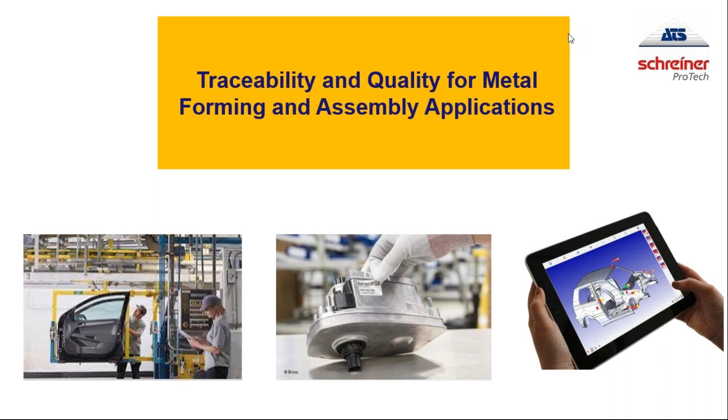The focus of the webinar are possible solutions for two issues that many OEMs and suppliers are facing today. As manufacturers continually drive lot sizes to smaller quantities, companies are facing increased documentation and traceability requirements. In order to respond to quality issues, the question becomes, how do I serialize and mark my parts and assemblies? And then how do I digitize my quality data and trace that data back to the individual unit level?

This is especially challenging in metal fab and assembly processes where metal parts are difficult to mark, and both parts and assemblies may go through welding, painting, or other processes that have harsh environments. So we're going to start today with Doug Stubbs from the Schreiner ProTech company, who will provide an overview of innovative labeling solutions for metal fab and assembly operations.

After that, I'll give a brief demonstration of software that's in use in many plants for recording and reporting out on your quality data.

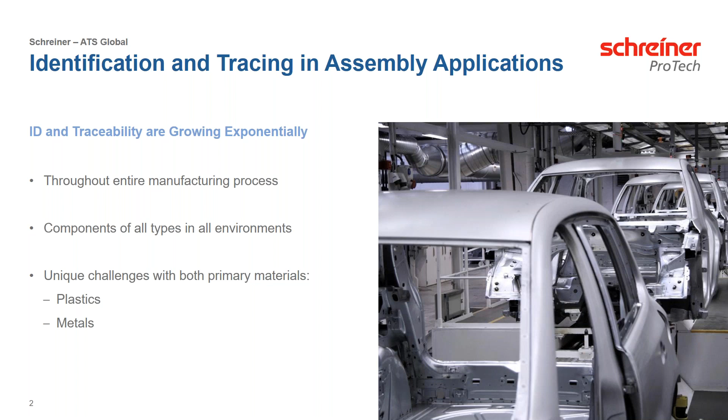There are unique challenges with both of the materials that are used in typical assembly applications, in particular plastics and metals. So there are three real common technologies available for individually marking for assembly applications. The first and most simple, of course, is traditional labels. Traditional labels have had their difficulties in some applications because of the primary challenges of adhesion, abrasion, and contaminants or chemicals.

In particular, the ability to keep the label onto a particular substrate is dependent upon the material itself, as well as the adhesive that is selected. There are a lot of very good, huge adhesives companies now that can create formulations to stick practically any label type material onto virtually every surface as well.

In terms of abrasion, that has always been challenging, particularly in assembly applications where the parts can be very bulky and not individually packaged, and therefore they can be scraping and bumping against each other throughout the entire process. So any label that is exposed must be able to handle this kind of jostling around and potential abrasion as well. And then the most challenging can be the influence of contaminants or chemicals.

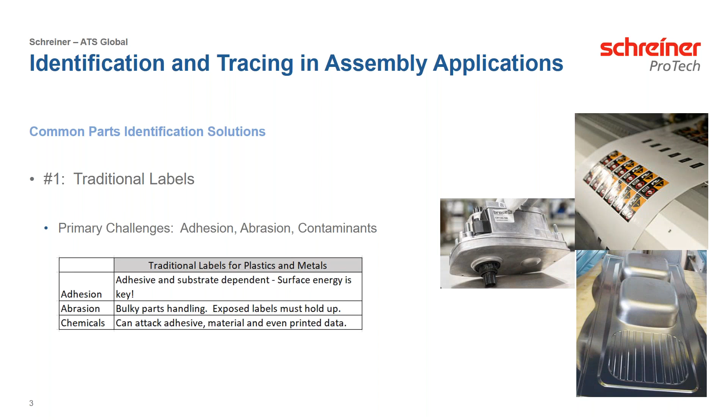Chemicals in particular can be very challenging for labels because they can attack and degrade the adhesive. They can attack and deform the material or the paper-like material of the label itself. And even after a label is printed, the ink that is on the label can be compromised with the right mixture of chemicals in typical processes as well.

So one of the primary methods to protect a traditional label is the use of a protective mask. Individual masks have been around for decades. They're basically a removable overlay that is a protective wrapper for the actual label itself. When constructed correctly, they are both chemical and process and abrasion resistant.

They protect the entire label until the time of your choosing when you wish to remove the mask itself. They are typically not a very costly solution to this, and they are exceptionally used in many applications throughout these kinds of processes.

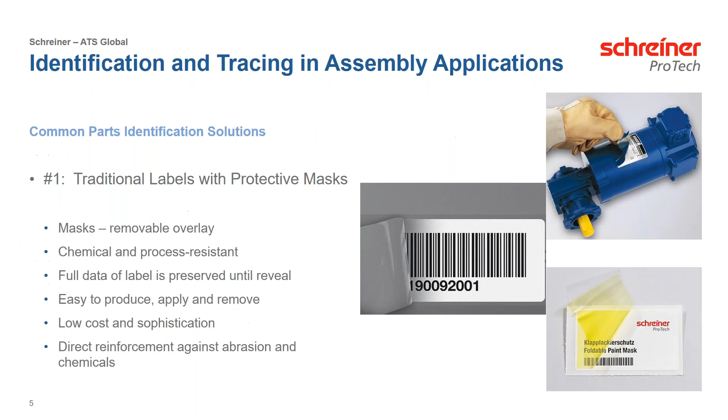A second technology that is very common but not well known is the use of laser etchable films. These laser films are extremely rugged, adhesive-backed traditional type labels, just made of very special types of materials. They are extremely resistant to chemicals, extremely good against abrasion as well. They can work at very high temperatures, very low temperatures, and they are an alternative typically to direct laser marking on the parts themselves, and they use standard industrial lasers.

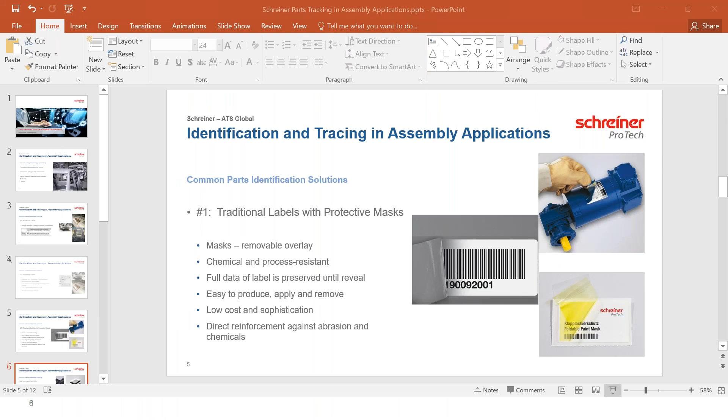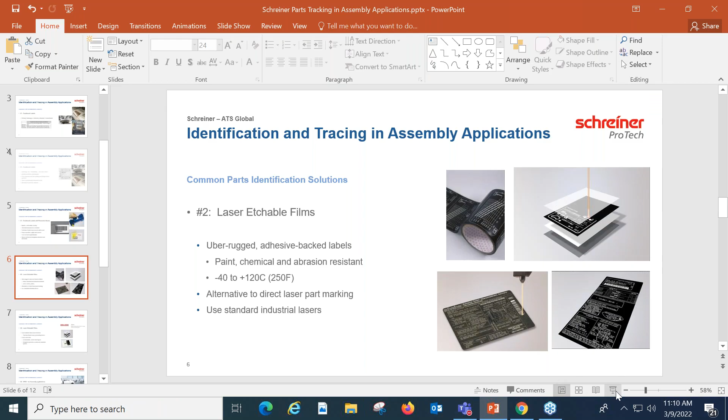Okay, there are two primary types of these laser etchable films. The most common is known as an ablation film. Ablating an actual material is where you use the laser to burn off a top layer and expose, in this case, a different color second layer beneath it. In the video we just saw, it was a black material and it was then exposing the white underneath it. Ablation films are exceptionally common. However, when they burn away that top layer, those fumes have to go somewhere. So you typically have to have an air reclamation system to keep those fumes away from workers as well.

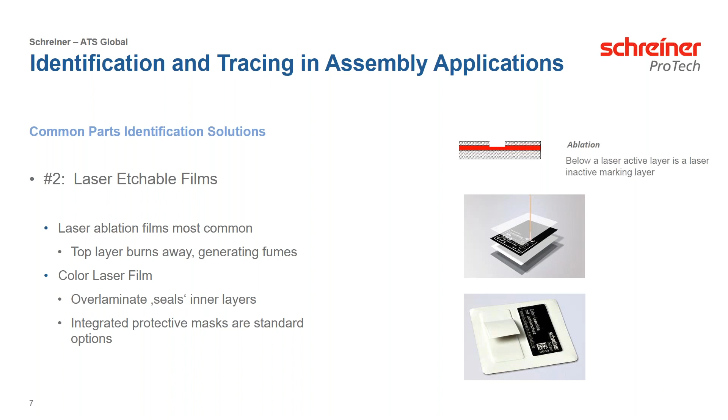A second option, very similar in construction, is known as a color laser film. The primary difference of a color laser film is that it has a top layer, a top laminate that seals in the layers beneath it. When the laser prints through that top laminate, it does not damage that laminate. It simply passes through it and then pushes away the black material to expose the white underneath it. The primary benefit of that is there's no smoke generated during the printing process because all of the black material is sealed in, resulting in a no fume type application. And this particular product is available with optional paint masks or protection masks that we looked at previously too.

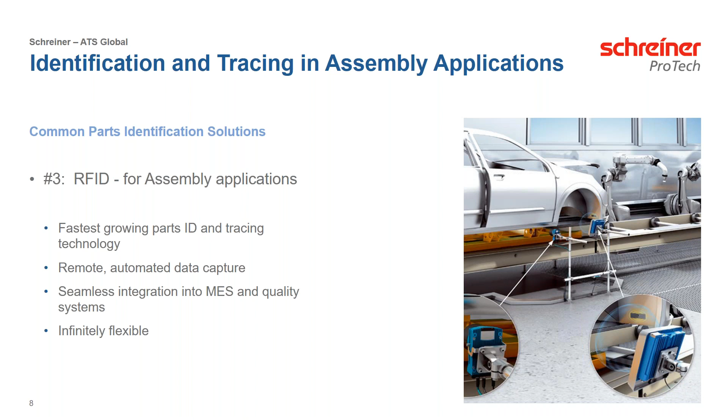The third technology for tracking individual parts is the use of RFID. As most people know, RFID is by far the fastest growing technology used for individual tracking, tracing, and identifying of individual parts. It is a remote data capture technology where you don't look at a label, it's simply scanned and recorded up into the software and your overall MES system.

For RFID labels to be used on individual parts, there are two primary form factors of the receiver, the part that goes onto the actual part itself. One is traditional labels, just like we just discussed. You put the electronics inside of a label type of construction with adhesive on it, and then apply that label onto the actual individual part. This is exceptionally common.

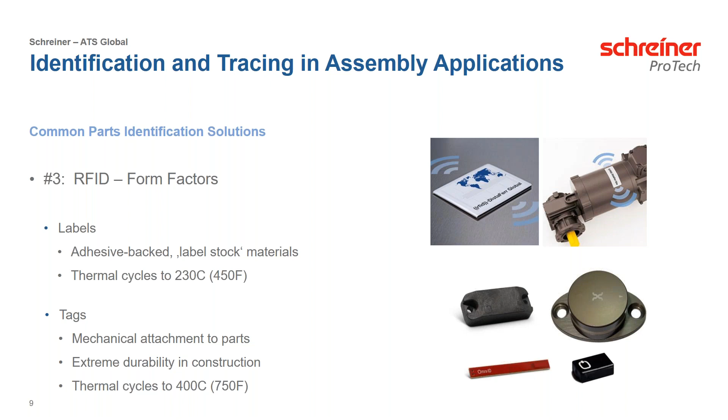The second common form factor is RFID tags. Tags come in many different form factors, sizes, shapes. They can be exceptionally durable if made out of the right materials. They are typically mechanically attached via a fastener or a strap or something similar to bond it onto the part, either temporarily or permanently.

So when we look at using either of these RFID form factors on either plastic or metal surfaces, they are absolutely both viable options for tracking these kinds of parts. With labels with the adhesive backing, you have, in terms of adhesion, the same considerations that you do with just applying a regular label.

In terms of abrasion and chemical resistance, you can also have, in many instances, the protective masks put over standard labels as well as RFID labels. Comparing that with the RFID tags in their various form factors, their adhesion is not necessarily a consideration unless you have an adhesive backed tag. And then in terms of abrasion and chemical resistance, those form factors are very unique and exceptional in being tolerant

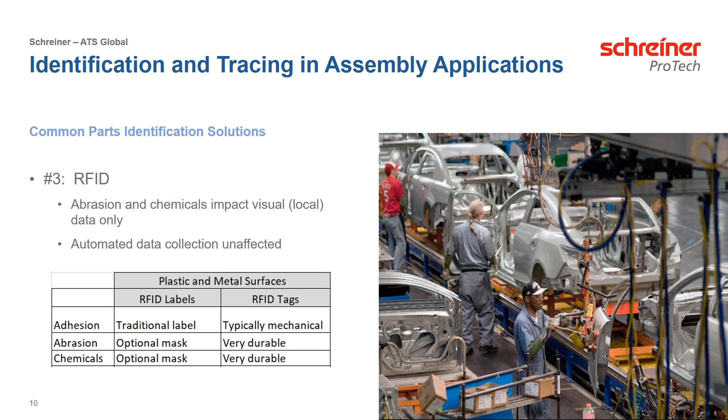of difficult environments here. So if we take a peek, in summary, at these three different technologies and what are available, traditional labels are, of course, the most simple, lowest cost, easy to implement. The laser etchable labels are a step up in terms of their ability to adhere or resist chemicals and abrasion, exceptionally durable. And then the RFID product lines on the far right-hand side, depending on the form factor chosen, offer

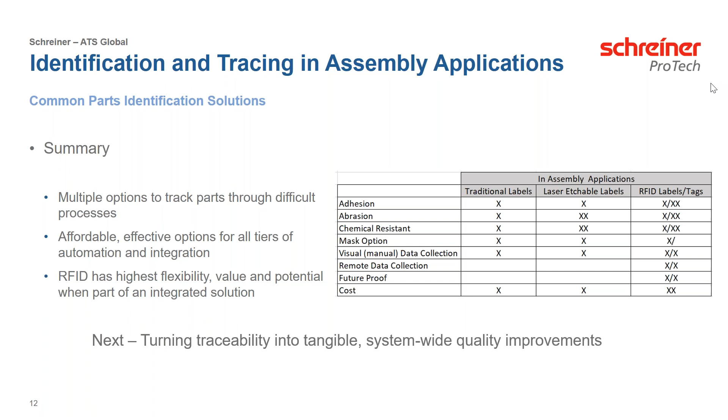the various options. The primary enormous benefit of RFID is that it allows you to have automatic transfer of the data and tracking of those parts directly up into your system without physically looking at the label itself. So next, I'll pass it back over to Nick, where he will talk about what you can do with this actual information now that you've got it available off of the individual parts.

Nick? All right, thanks, Doug. Definitely not your father's labels, I guess I would say. A lot of versatility there. So you should be seeing my PowerPoint slide, is that correct? Yes. Very good. All right.

So once you've marked your products using one of the methods that Doug spoke about, you now have the ability to identify that product throughout your processes. Now, this is especially important when you're collecting quality-related data, whether you're stamping, welding, assembling with adhesives, or similar processes. Every product flow has quality gates established where inspections and repairs take place. So as Doug pointed out, it's not just typically a final assembly station anymore.

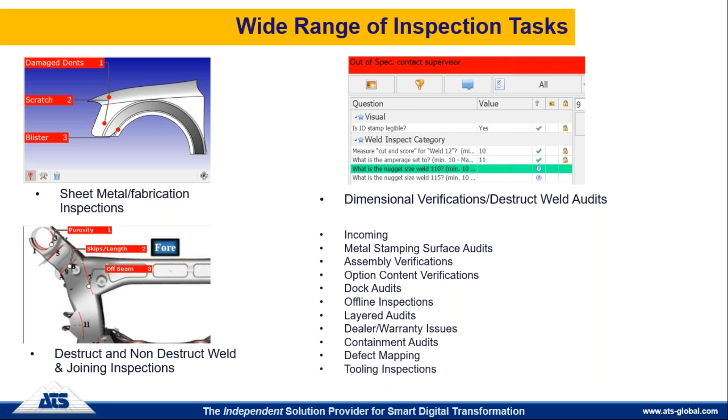Due to the small lot sizes and the need to respond very quickly, there are multiple quality gates with multiple types of inspections, as you see here, that typically take place throughout a process. So there usually is a final inspection, but there are usually other types of inspections that you see listed here, like dock audits, layered audits, audits when one fabrication area releases components to another area, etc. So if you're collecting that information now, it's probably being done on sheets that look similar to this.

So there's generally two form factors that an inspection process takes place on. One, if you look in the upper left-hand side of this, is a sheet that lists an image of the product, and an inspector notes defects and defect locations against that image so that your tooling people have an actual idea of not only what defects are occurring, but where they're occurring. The other type of interface or paper form that's used is what we would call a checklist. There are many forms of this. I have two listed on the left-hand side of my slide here.

One is a good example of a non-destructive weld audit, where an inspector would be presented with a list or a diagram of various welds, and then they have various types of defects to choose from. And if they see any of those types of defects, they'll mark them on the form. If you look in the upper right-hand side of the slide, you'll see what is typically called a start of run production check sheet. When a job or piece of equipment is set up or a changeover takes place, generally there are various criteria that an inspector verifies to make sure that the job is going to run correctly. Those can be measurements, they can be visual verifications, etc.

So if you're using pencil and paper to collect this data now, that's typically problematic in the sense that, number one, there's always a lag time from when that data is taken from the paper format and put into an electronic format, such as an Excel spreadsheet. And B, well, you now have a lot of defective material built up in your WIP, so you have to do sorting and other things if you fail to catch a problem due to the non-real-time nature of paper and pencil. So another alternative to paper and pencil is a software package that replaces those paper forms.

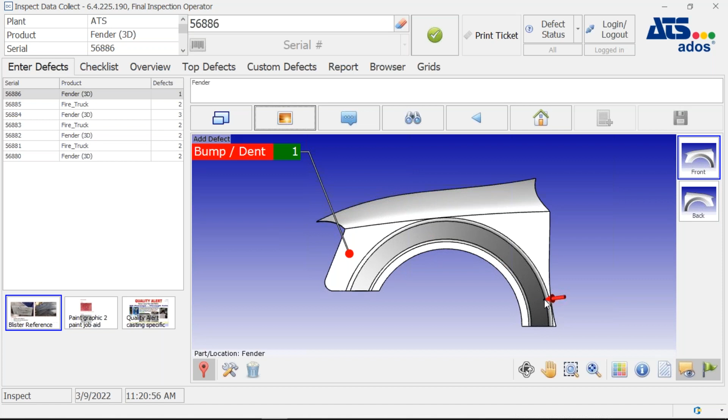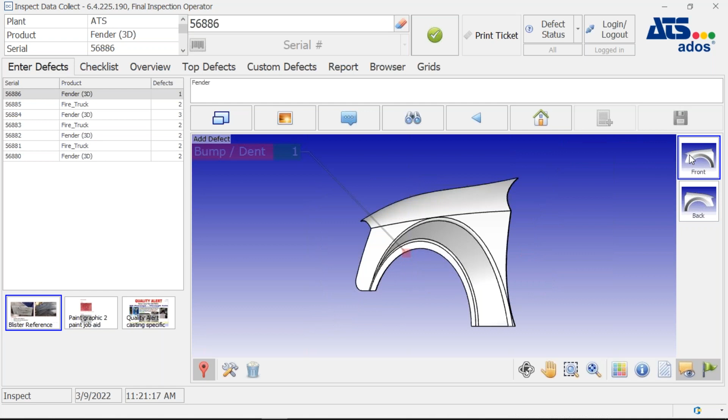I'd also like to point out this is a live CAD image, so I can rotate it. We also have the concept of thumbnails, which you see over on the right-hand side, and by clicking on a thumbnail, it will change the orientation of your CAD image to a predefined zoom level and orientation, so you can place the defect exactly where you see it on the part. So you can place multiple defects on the part. It's very fast. You can see here, I'm just going to place 2 or 3 defects, and you can see how simple that is.

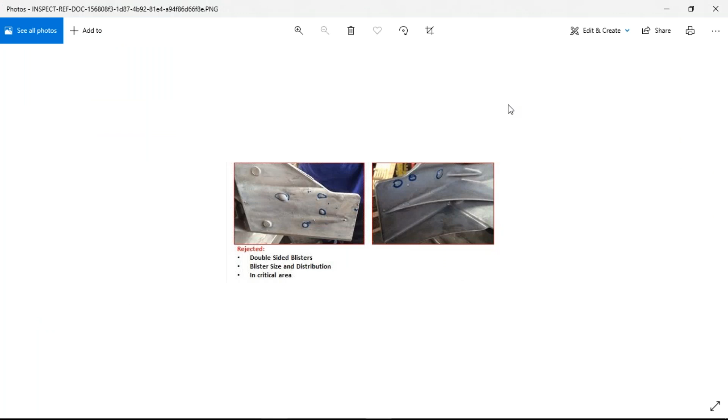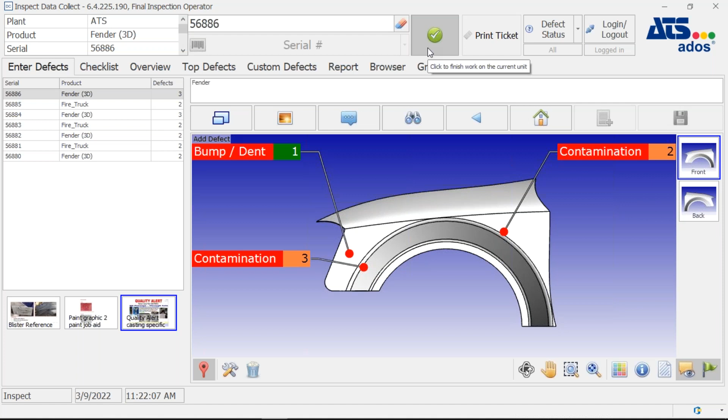So at any point in time, if you look over on the left-hand side of your screen, you can also see that we can make electronic versions of job aids, work instructions, etc., available to your inspectors. So I can have more than one. These can be videos, they can be photos, they can be PDFs or Word documents. You can also send quality alerts to the floor. So if you have a known issue, instead of printing out sheets of paper and hanging them at your stations, you can immediately make your inspectors aware of a quality issue that they need to take note of. So that was a simple example of collecting defects in a visual manner on a stamped component.

But now let me move to an assembly. So what I'm going to do here is I'm going to imagine that I am creating or assembling fire trucks. Now I'm also using this example because I want to show that you don't have to use a CAD image. In a second, you're going to see multiple photos being brought up, and you can also use photos if you don't have access to your customer's CAD images, etc., in order to use them for inspection.

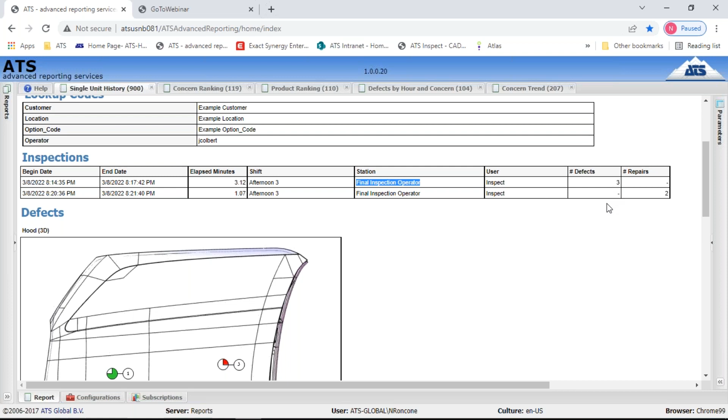There are other ID fields available for things like airbags or other child components you want to tie to that parent component. As I scroll down, you'll see that this hood has been inspected in 2 areas. I can see how long each inspection took, what shift it's on, who the operator was, what station it was collected at, how many defects there were or repairs during each inspection, and other information.

As I scroll down here, I see an image of the hood. It notes the locations of the 3 defects that were found. The green marker indicates that that defect has been repaired. The red marker indicates that that defect has not been repaired and is still open. You can get more information on each one of those 3 defects. Here, for example, on this dent, I can see the comment by the inspector is that there's new material handling that might be producing those dents.

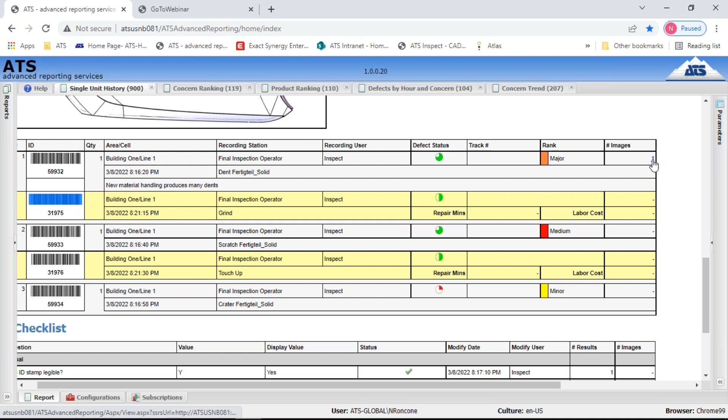You'll also see over here in the image column on the far right, I see a 1, which tells me that I can click on that because there's an image of the defect that has been attached to that record and that defect on that unit. So as I scroll down even more, the record concludes with any checklist questions I had. In this example, I've answered 5 checklist questions and 1 of them had a non-conforming answer. So every unit, as it goes through my processes and my quality gates, will allow me to get a record of everything that happened to that unit.

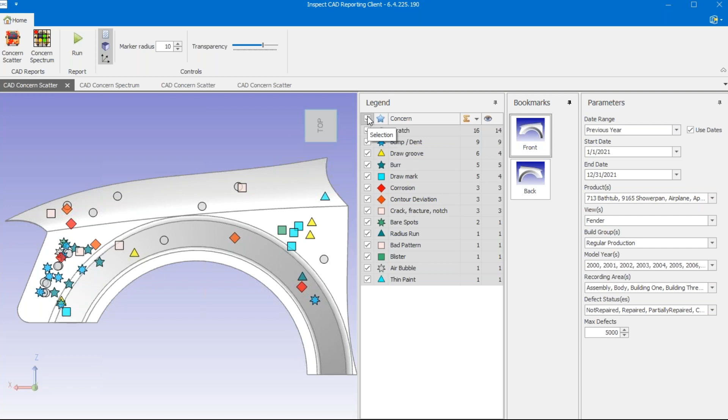Over here on the right, you can see that we've assigned a different icon to each type of defect. I can map all defects, or I can pick just a particular defect, such as a scratch in this example, and I can map those as they occur on multiple records, and they're all mapped on one image. This gives me real powerful information to go back and make tooling and material and process changes.

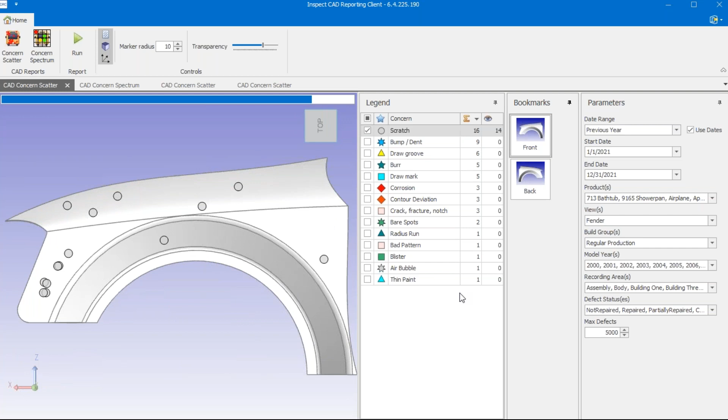This is a live CAD image. As we talked about before, you can rotate the CAD image as I'm doing here. All right, so that's a quick review of the data collection and the reporting.

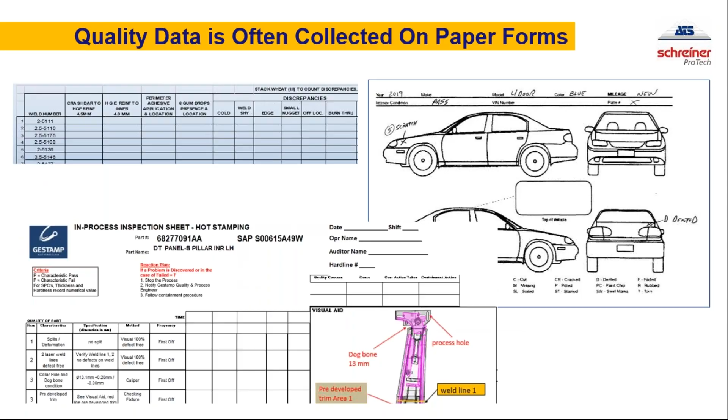The first is if that part is going to be painted or coated after the etching were to occur, it can be difficult. A colored paint, of course, would obscure the marking entirely, but if you have a label with particularly a paint mask on it, you can then preserve it and be ready to go after that step. Another prominent use case is that not every material is suitable for direct part marking. For example, if you have a black plastic material and it only lasers up to a gray, you may not get the contrast you need for a black-white type of marking.

And then finally, labels give you flexibility of branding with different colors. So the ones that we showed in the videos and in my presentation were black and white only. There's any number of different color combinations that are possible. You can't typically inject a blue into a metal part or make a particular plastic turn green, but you can do that with a laser etchable label.

All right, thanks, Doug. And next we have, is it possible to interface the Inspect software with other systems such as SAP? Yes, good question. So Inspect can certainly run as a standalone application, as it has its own database and its own reporting, so you can use it standalone. But generally people do want to get data from our software into other applications, typically ERP or MES type systems like SAP, Plex, etc.

So because the data is in an MS SQL database and because the software also offers a communications module, you easily have the ability to pass information in a variety of means such as OPC, text file outputs, etc., and decide what information you would like to pass to an ERP or MES system. I would also like to mention on the input side, we often interface automated test and inspection equipment such as vision systems, wheel alignment machines, leak testers, X-ray machines, things along this line to our software for data entry.